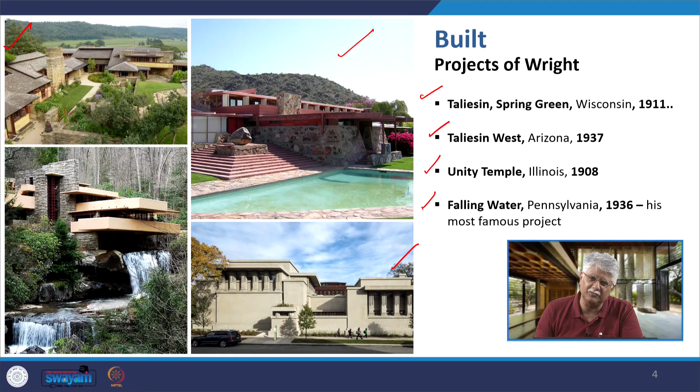He also built taller buildings, though he was not in favor of them, but there were some initiatives he took, like the Price Tower in Oklahoma in 1956, the Johnson Wax headquarters building in Wisconsin in 1939, along with the entire Johnson Wax complex, and the Marin County Civic Center in California, a big project in 1962.

And then the summation of all his works, during which he passed away, was the Guggenheim Museum in New York. It stands as a testimony to the greatness of the architecture of Frank Lloyd Wright, often compared, by your generation more so, with the Guggenheim Museum in Bilbao by Frank Gehry.

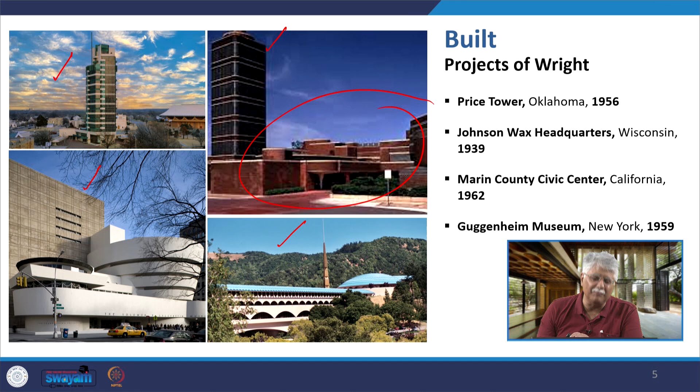Now, what is the impact of the Prairie Houses? The Prairie Houses led us to a new domestic architecture, a domestic architecture of horizontal lines, I'll explain to you why, of low pitched roofs and open interior spaces, predominantly meaning a free flowing plan. The impact of the Larkin building was that the innovations he brought in had a very strong effect on modern office building design.

This is the Larkin building. The building is no more. It was built in a very dense industrial district in Buffalo, New York. The building was ultimately demolished, but the agenda was to innovate modern office building design, and he innovated it at so many levels.

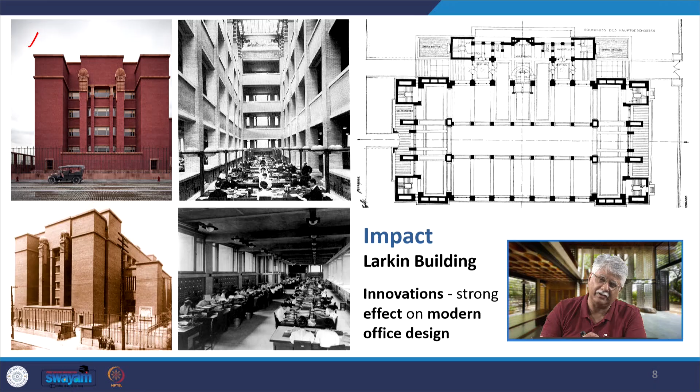Then innovating in structural systems. I told you that he was part civil engineer, an excellent civil engineer, or rather I should say structural engineer. And so in Fallingwater he went in for cantilevered construction, which still stands today. In the Imperial Hotel in Tokyo, he brought in a very unorthodox earthquake resistant system. As a result, the building stood firm even in a very big and massive earthquake that happened in 1923.

Then the unorthodox Johnson Wax building with its mushroom shaped column, as you see here, which initially the authorities were not willing to sign off on or allow him to build. So he actually got one built on site and overloaded it in front of them way beyond the factor of safety, way beyond the load the column would ever have to carry, and only then did the column crack. And all the people immediately realized Wright had built something that was going to last.

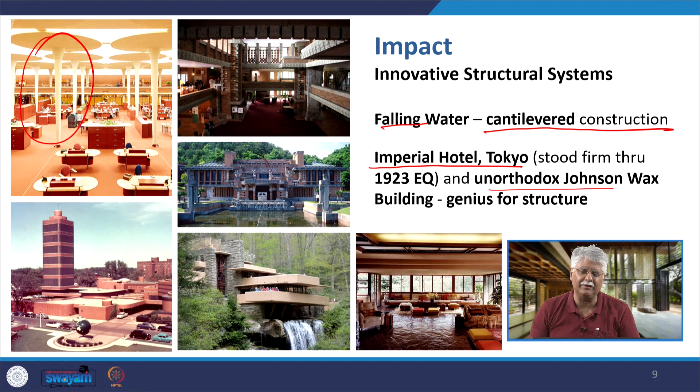It was structurally fine, there was no problem with it, and they had to acknowledge it, they had to agree to allow him to build it in the Johnson Wax. Now, Fallingwater itself has been said to be a poetry of interlocked spaces and masses, one of the greatest examples of organic architecture in America.

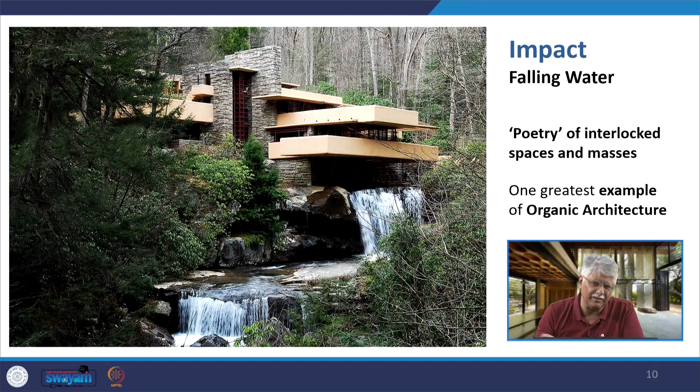What is organic architecture? I keep on saying organic architecture. Organic architecture is an architecture that has got to do with the land and with the resources, that it becomes one with them. He said, for example, a house should be of the mountain and not on the mountain. I hope you get it. The house should be not on the mountain but of the mountain.

When you make a house along with the mountain landscape, make it in a manner that it becomes one with the mountainous landscape. You draw your building material resources from there, you try to design it in a manner that it completely merges or flows with the terrain of the surrounding landscape, as much as an architect can possibly do. So organic architecture is an attempt by Frank Lloyd Wright and others who followed in his wake to build a building that is in harmony with the natural environment and not against it, right?

A lot of these things we hear about today, because we want to make buildings that are zero carbon, sustainable buildings, energy efficient buildings, and carbon efficient construction. What are we really talking about? This is what we are talking about. We want to make buildings that do not destroy our natural resources, that preserve our water, our land cover, that do not allow too much carbon emissions that cause damage to the atmosphere. What they were talking about empirically and intuitively, we are now talking about scientifically and numerically, but the result is the same.

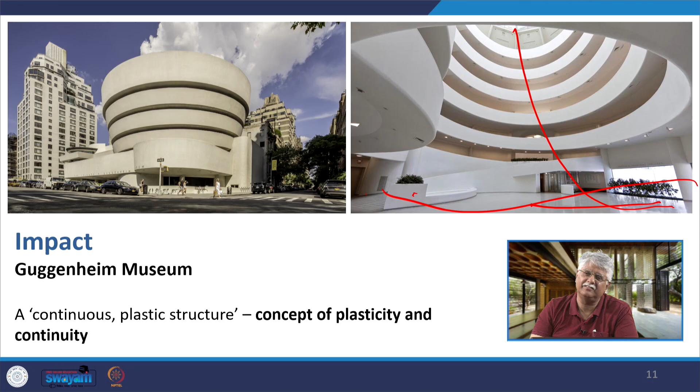It's a building that flows in terms of light and wind in the vertical direction and flows in the horizontal direction. Here he was able to achieve movements of people in the vertical and horizontal directions, and wherever you are standing in the museum looking out, you will see the entire exhibition displayed, all the people watching it at different levels; you are always connected with them, the concept of plasticity and continuity.

Now when we go back to the early influences on Wright, he was influenced by Japanese art and architecture, Mayan architecture, and later on by modernism. Very small beginnings, and even great architects start with common projects. He designed the Charnley House in Chicago in 1891, and his great desire was to break the box. He always wanted to break the boxiness of the house, where you have a box with a series of smaller boxes in it, each opening up through a linear corridor. He did not want that. He wanted the house to be a free-flowing interior space.

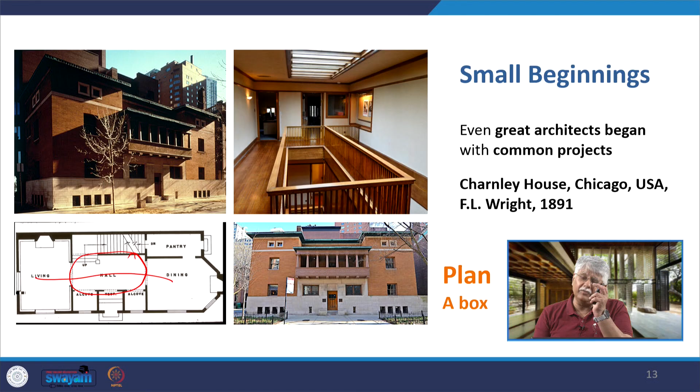But when he attempted that in the Charnley House at a very young age, he was not successful. In the Charnley House there is an attempt made. He has created a hall big enough, connected it with these two large spaces, but the box pretty much remains the box. Then the Japanese influence came. He did the Charnley House in 1891, and he was searching for something that would lead him towards breaking the box, and that something happened. In 1893, there was the World Columbian Exposition in Chicago, and in that exhibition was displayed a wooden Japanese temple.

This completely transformed Wright, completely fascinated him when he saw it, and through this he was able to transform the whole idea of residential design of houses in America by focusing on Japanese principles versus the prevailing Western formula of boxes versus what the Japanese were doing.

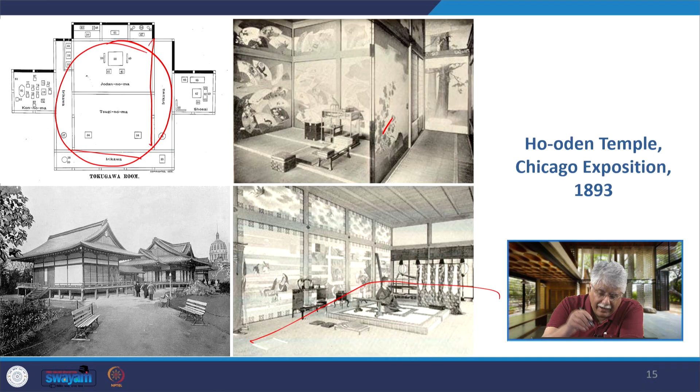The other thing is that the entire design in this case is based on the size of the Japanese mat called the tatami, and that governs the size of the house itself. So Wright was able to understand the concept of Japanese architecture, and its first appearance happened in the Winslow House just 2 years later from the Charnley House. So you see it like this: Charnley House 1891, he sees the exhibition in 1893, and in 1893 he gets the commission to design the Winslow House in Oak Park, Illinois.

For a very rich man, he designs the house, but he is not able to break the box again. He fails. He attempts. So if you watch carefully, there is this space here that is opening up towards the bay window. There is a connection with this space and this space. They seem to have certain fluidity, but when you start going into the interior of the houses, you realize things just start falling apart. So much so that there is a complete contrast between the front and the rear facade of the building. You see as if you are looking at two different buildings.

This is the front, which is very, very strongly symmetrical along the central axis, and then you see the rear, and all hell breaks loose. Every conceivable geometrical feature: there is a cylindrical feature, there is an octagonal prismal feature, there is a pitched roof. All of them are coming together in the rear. Thus there is a strong symmetry in the front, very strong, and a collection of forms in the rear.

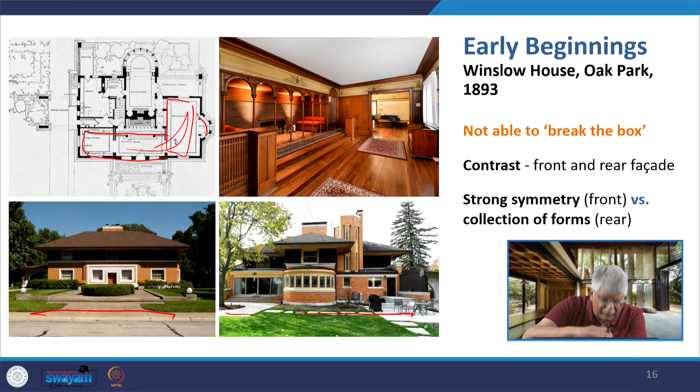No doubt that these houses in themselves were good houses. They were still uniquely different from the other houses. Some of the ideas were different, like the height of the building, the way that he perceived it in a flat prairie landscape, that idea was here. But if we go on forward, other than this, in the early Winslow houses, we also find the decorative work of Louis Sullivan. As I have told you earlier, Sullivan was connected with the Art Nouveau movement, arts and crafts, and he brought that kind of decoration in his tall buildings.

And because Wright worked with Sullivan, he was impacted by Sullivan, he brought in that artwork into his buildings, and there was a connection of the arts and crafts movement in the woodwork of Wright's buildings. See, Wright was the total designer. He wouldn't just design the house; he would design the furniture, design where to place the painting. All details were worked out by him as the architect. So these ideas of the arts and crafts movement, etc., were also carried over into the early houses. So we find the evidence here.

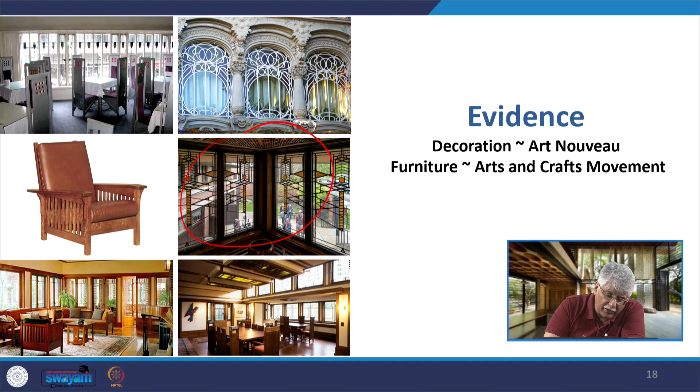With regard to decoration, we see Art Nouveau style grille work in the work of F.L. Wright, and in the furniture we find the arts and crafts movement style, that of people under the arts and crafts movement like William Morris, etc., and their furniture was highlighted here.

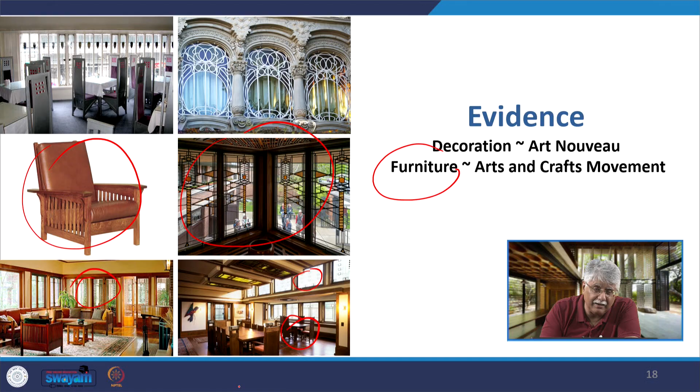So, breaking the box from complex boxy interiors into spacious and fluid spaces, he began to solve that problem by first making it a cross plan, a cruciform plan, and that he attempted in the Willits House. He designed this so-called cruciform plan. As a result of this, now if you watch carefully, this is the central area which has got the fireplace also, and now the space flows on the side and goes into the back region.

In this case, it flows and goes into the dining area here, flows and goes to the kitchen area here. It does that without the need of barriers like doors, etc. So now there is a certain fluidity in the entire space. He is able to achieve that, he is able to allow that kind of flow happening in the building, and this is an idea he has borrowed from the Ho-oden Temple, but he could not achieve that so much

in the Winslow House. So, the cruciform plan is in the Winslow House, and this is a moving up from the cruciform plan we find in the Willits House. So, we find here the cruciform Willits House. We have moved forward from the Winslow House to the Willits House in creating the cruciform plan.

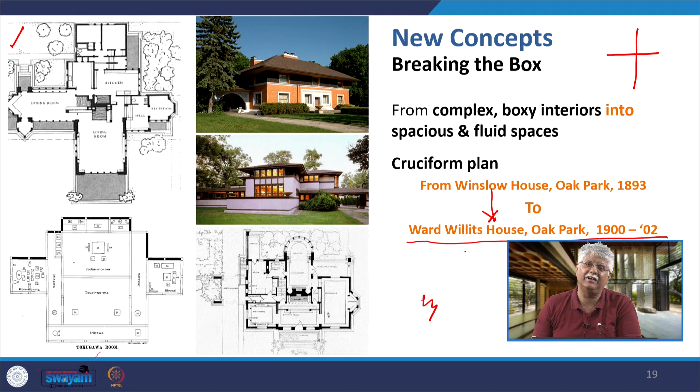Again, this is an example of a traditional Japanese house. This is a traditional Japanese house, and we have compared that with the Prairie House. I have compared it with the Robie House, which I will show you, to show the free flowing interiors that had come into the work of Wright. So, this is the free flowing interior. These are the two examples of Japanese house, and then we have this and this as example of the free flowing house, which is the Robie House. So, we see these new concepts coming in.

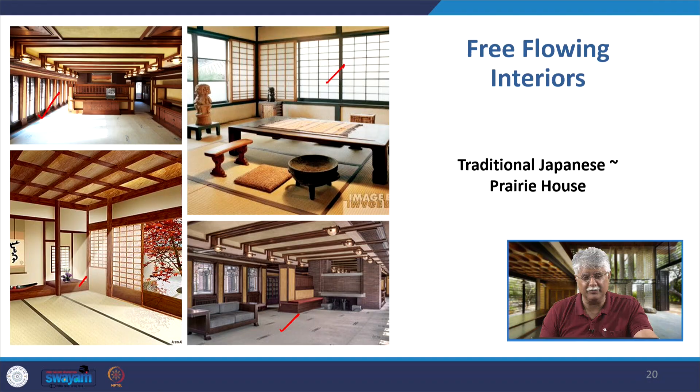When it came to the free flowing plan, he attempted it in the Winslow House, he pioneered it, but only this much he could bring about that fluidity. When he did that in the Willits, much of the house was made fluid and the open plan movement in which people could just flow from one place to another.

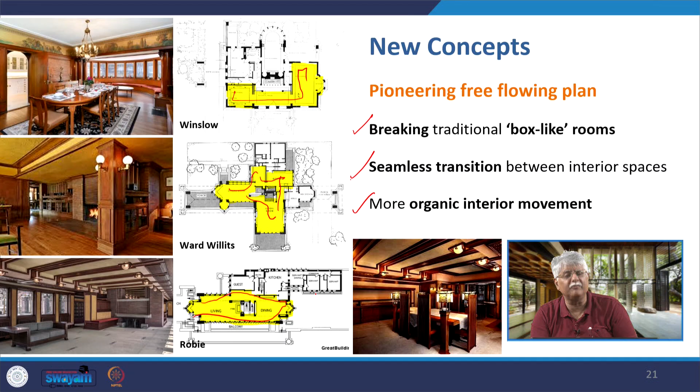Whereas when we come to the Robie House, the entire floor plate here with the living and the dining is completely flowing one into the other, except for the fireplace in the center, and he retained the fireplace in the center. He considered that fireplace or that hearth to be the center of every family. It provided psychologically a sense of security regarding the family that is holding them together. So, he never removed that, but he brought this idea, and thus he was able to break the box. He brought in seamless transitioning, and he brought a more organic interior movement, more fluid and open planned interior movement.

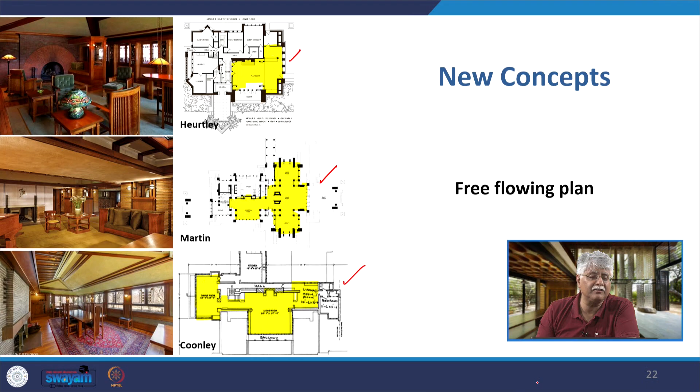Now, the horizontal proportions were emphasized. Horizontal proportions, that the building is more horizontal than vertical, was emphasized through overhanging roofs, because they tended to pull your eye towards the horizon, towards the flat prairie landscape. Other than that, they also provided shade for indoor thermal comfort. The lowering of the scale was able to harmonize the building with the long and flat prairie landscape, which was his original intention.

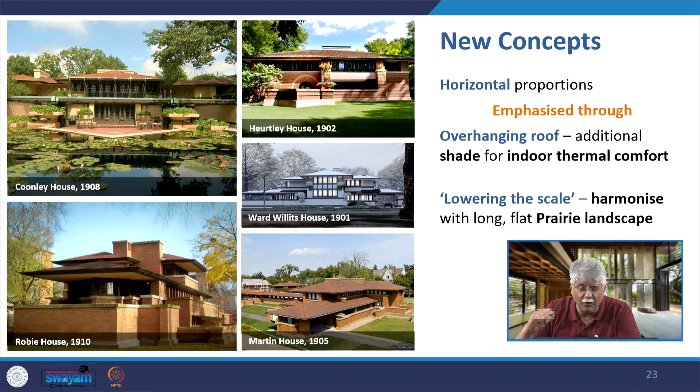As he said, the house should be of the hill. Therefore, if the landscape was completely flat as in the prairies, the house had to be of the prairie, completely low height with large overhangs. When you looked at the house, your eye should be drawn towards the horizon, towards that line, and thus feel small. The scale seems to be pulled down and not tall but flat and low horizontal like the landscape. So lowering the scale, harmonizing with the long flat prairie landscape.

So if you take the Winslow House here and an ordinary house of that period, you see this is what happened. In the Winslow House, these are two stories. What he did was, this coping that he has provided, this band, he made it slightly higher into the floor above. I mean to say that the floor plate between the two floors would be somewhere here, right? He made it so that the window would start from this darker area. You would feel as if it is a 1.5 story house, but actually it's a complete 2-storied house.

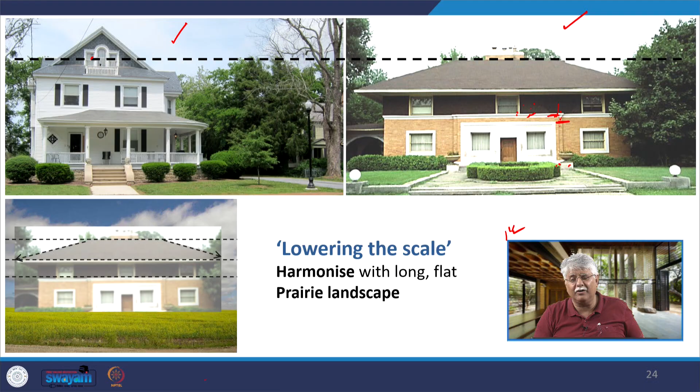But by the way they have arranged the outer aesthetic, the way the roof has been extended on either side, the way the roof has been overhung, it's a pyramidal roof, the sense given is this is low. So you compare it with this house, this is a complete 2-storied house with maybe an attic, but it seems higher, taller, and this is what I was showing, the various lines which are all pointing towards the horizontal direction.

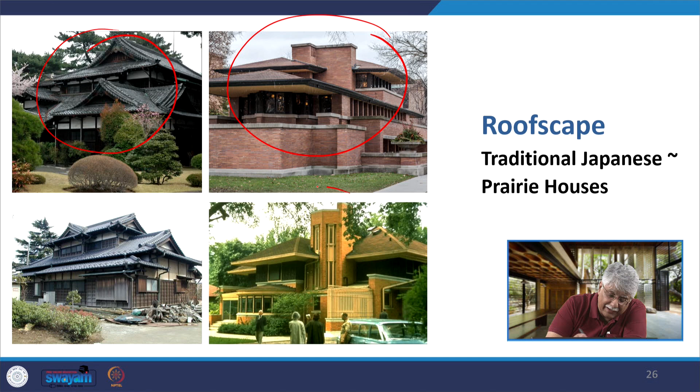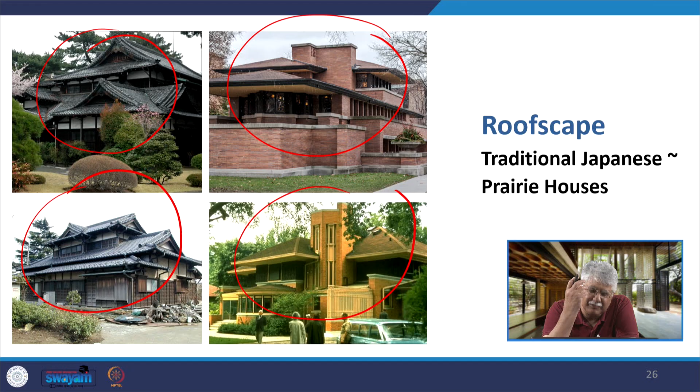When it comes to the roofscape, again we compare it with the traditional Japanese. We see that this is the traditional Japanese composition of pitched roofscapes, and we find the same combination in the Robie House, a collection of pitched roofs, like the collection here in this temple. Wright was so deeply influenced by the iconography, by the pictorial representation of Japanese architecture, he borrowed heavily from them.

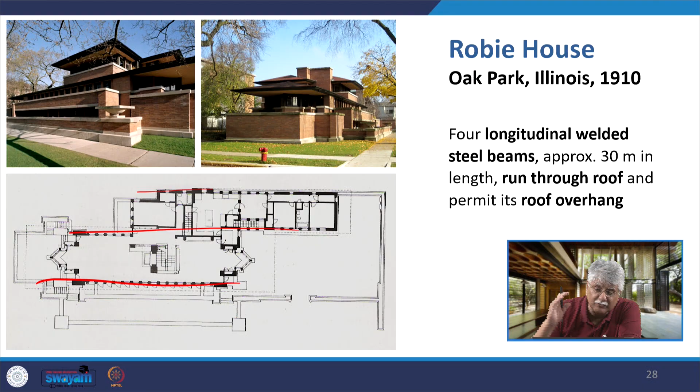To get that kind of cantilever he wanted in the balconies and terraces of the Robie House, he provided 4 longitudinal welded beams running in this direction, so that these welded beams will carry the load of the roof, and they are approximately 30 meters in length. They run through the roof, and therefore he could have large overhangs as you see here, and these large overhangs not only serve to provide shade to the people standing outside, but they also pointed you towards the horizon, towards the horizontal line, and thus lowered the scale.

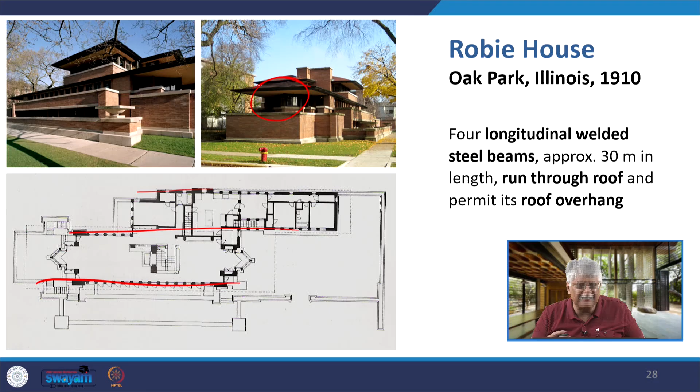So when you look at the Robie House, ask yourself this question even as you are hearing this lecture. Does it look to you like a complete 2 to 2.5 storied house? It looks smaller, it looks more compact, but it's got the same amount of space, the same volume and open spaces inside it. So in lowering the scale, he extended the cantilever terraces like this, with low story heights. Here, see, he constantly extended it.

And then he gave horizontal parapet bands. There are these bands given in concrete here, and he gave long elongated enclosures around the house. All of it to show the scale is low.

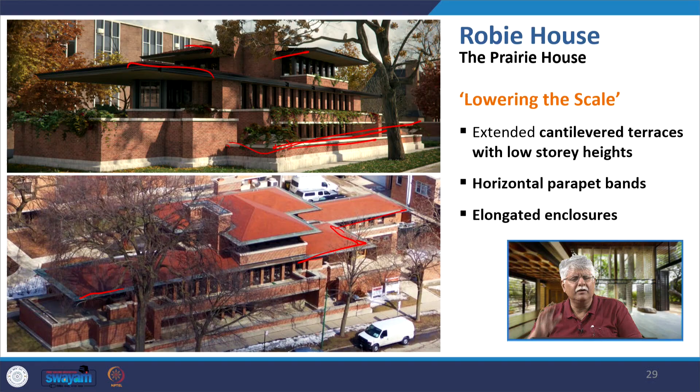At the time, the rich people would like to have a monumental building that would show how wealthy they are and how great they have become. Wright, when he worked for these same millionaires, gave them a house that was unpretentious, that was just off the street and very quiet, very understated, very low key, and yet it was the beginning of a completely new movement in architecture. Lowering the scale throughout is what he attempted to do.

In the Robie House, the technical innovations are that the rim was set lower than the ceiling, as an enclosure, and it emphasizes horizontality. I am talking about this rim. This rim has been made lower than the ceiling of the house, and it is used for several purposes. There are lines running above it in the vacant space between the false ceiling and the main ceiling, and along this he hung these Japanese globe lights with wires set into it, and the wires would be completely concealed because they are going into the backside.

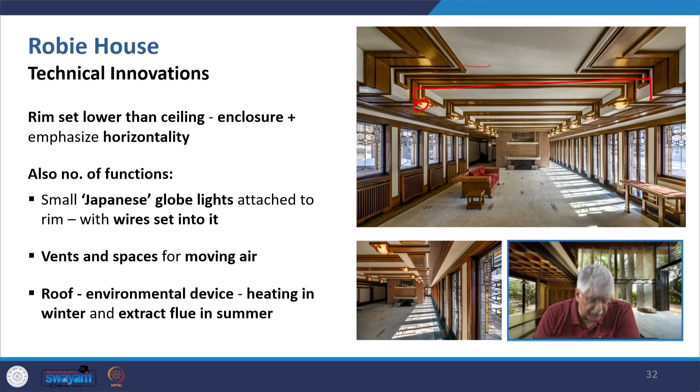And vents and spaces are there in this system for moving air in the building, because in those days we are not talking about a complete air conditioning system. Thus, in a sense, because of the way he designed this roof, it became an environmental device which would heat the building in winter and extract flue through the house in summer and keep it cool. So this kind of technical setup was made here through this roof feature, not only to bring in light and hang these Japanese globe lights wired on the inside, but also to move air through the vents and spaces, to heat it in winter and extract flue in summer to cool the house down.

Now, the guiding principles of domestic design: he said, reduce the number of separate rooms to a minimum, and altogether they should work as an enclosed space. This is based on a vast experience of having designed houses based on this new ideology or philosophy of free flowing plan. He came up with these principles based on that.

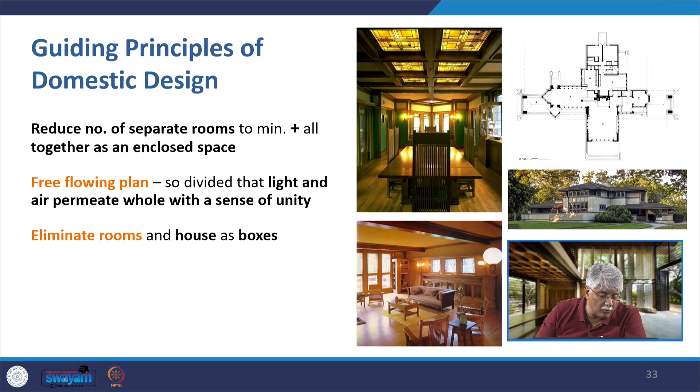The second is free flowing plan, so divided that light and air permeate everything in the house with a sense of unity. Number 3, eliminate rooms and houses as boxes. Don't box everything down. Don't have boxes, this one room a box, second room a box. Don't have it like that.

All walls should not be solid load bearing walls. Now the walls are only moving screens or enclosing screens or partitions. So here was the concept he was bringing in of RCC or frame construction, that the walls would not be carrying load any longer. Then walls and ceilings and floors, one large enclosure with inner subdivisions should be there. So we make one large enclosure, that is the house with wall, ceilings and floor, and then subdivide it with these partitions. That is in a sense what he was saying.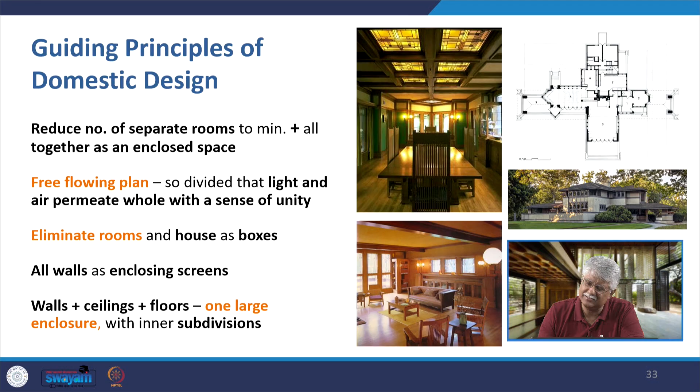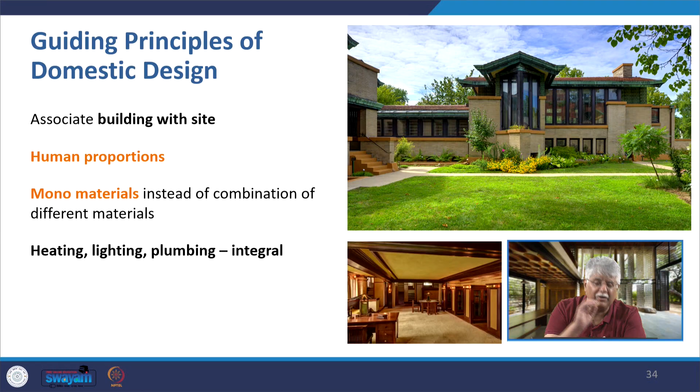And then associate the building with the site, have human proportions, use mono materials instead of a combination of materials, combination of different materials. Focus on simple palette of materials when you design. Then take care of heating, lighting and plumbing as they are integral to the building, and thankfully in the modern times we are very cautious about it. Our heating, lighting, plumbing, MEP, HVAC, all of it are very well integrated.

Then furnishings should be one with the building. It should be designed using machine work, not using hand craftsmanship. He was talking about prints, he was talking about furniture that was straight line, simple, clear cut, not very intricately designed like a textile designed by a craftsman. No, he was talking about very simple straight line furniture, simple tapestry, straight line, simple upholstery, all of that was simple. This is akin to Scandinavian furniture, which is also straight line, simple geometry. And we later on see that he had a tremendous impact on those architects in Europe.

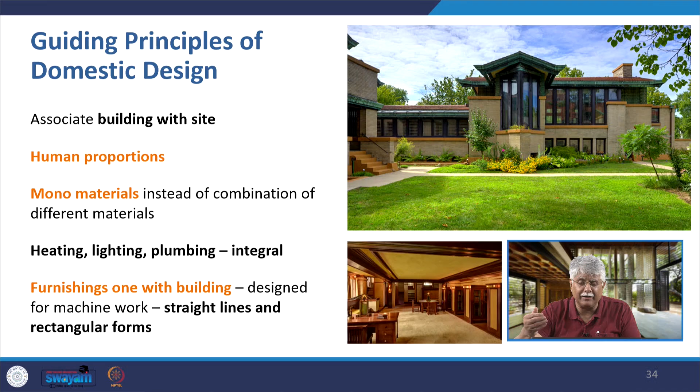This is the example of the Martin house, a very extensive house based on the organic house principles that he designed. This is a house in Utrecht in Europe, which I am putting up to show how younger architects were getting deeply influenced by Wright. Here G.T. Rietveld designed a house which was completely openable. These are partitions. If you remove the partitions, this is how the plan becomes of the house.

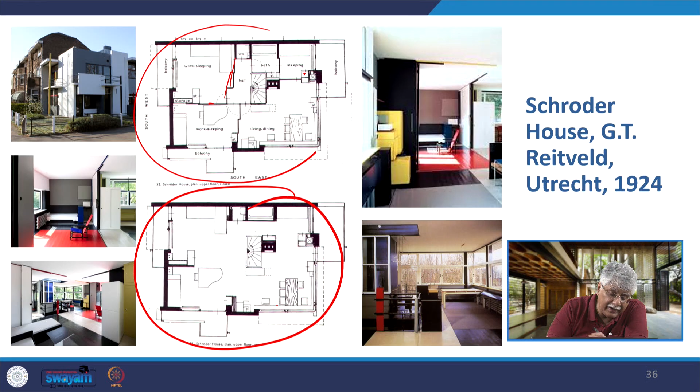It's a completely free flowing plan in which you have the dining area, the living area for example, a nook, a corner, and then you have a staircase here connecting everything. All the spaces in the house, everything is free flowing. This was Schröder House. And then if you want privacy, then you can just push some partitions and it becomes a space for 3 or 4 rooms. Very simple. So they went ahead of what Wright had done. They continued or they borrowed or they were very impressed by the idea of free flowing plan, but they built it further with modern technology and modern understanding.

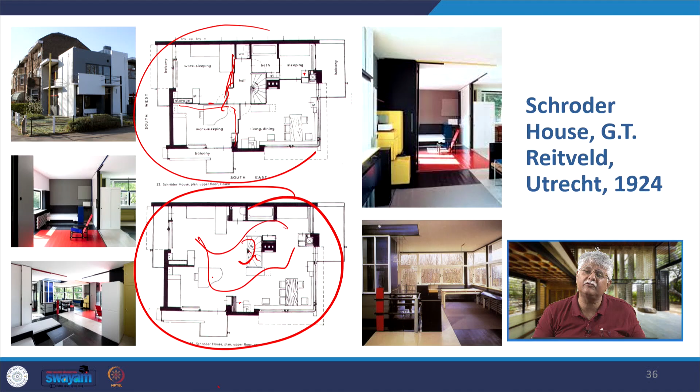Not only that, you will see in these houses, they are also using less colors. They are also trying to go towards simpler palette, but they do use very vibrant primary colors which Wright would normally avoid. And thirdly, if you find on their glass there is no grill work, something which was there in the works of Wright. Till very late he had this art nouveau and arts and crafts kind of decorative grill work in his houses, and that is not there here in the European houses built with the strong inspiration of Wright. So contemporary free flowing interiors, there are many such examples.

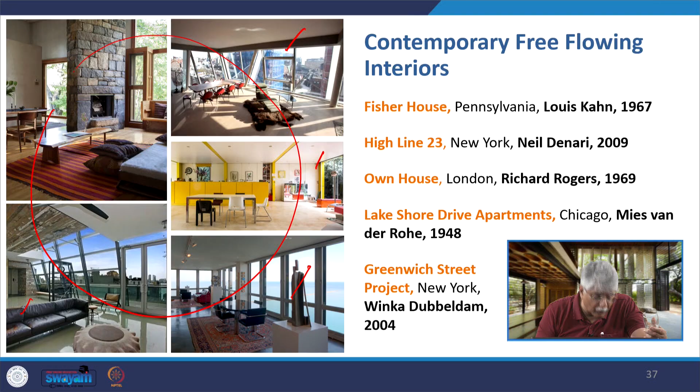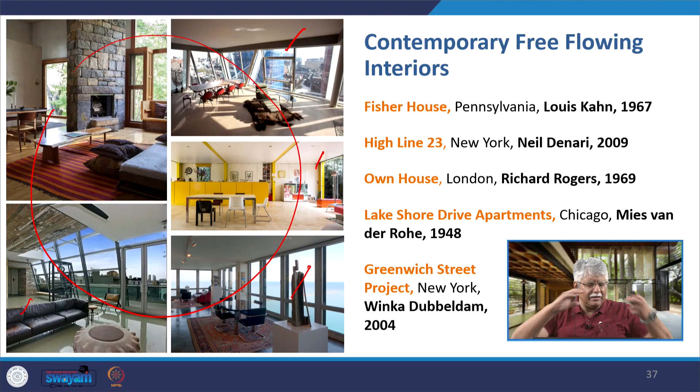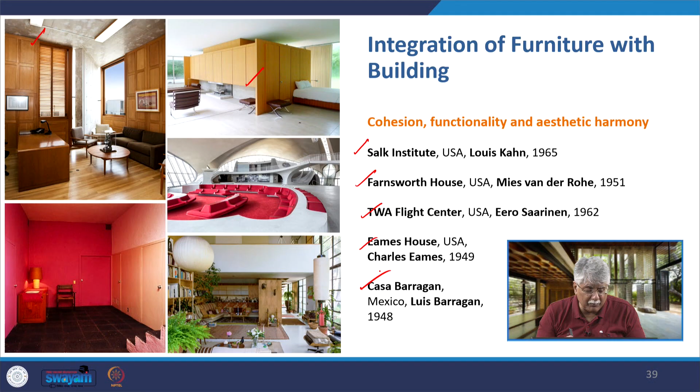And then in the Farnsworth House again you find glass and steel, and then it is connected or integrated with wood, whichever inner room spaces had to be designed. Then the TWA Flight Center, which is again using exposed concrete inside and out. Then we have the Eames House by Charles Eames, and again what you find is that all the decorative work is all in harmony with the house that they have created. And finally we have the Casa Barragan in Mexico by Luis Barragan.

But this impact on the European architects had a reason. You see, Wright had some very strong personal troubles in America at that time, and because of that he had to leave America. Having left America, he landed in Europe, particularly Germany, and there he was in connection with some people wishing to publish his work. Younger architects in Europe had seen his work, were very influenced by his work, wanted to embody that architecture in Europe, but they had limited access to the drawings of Wright.

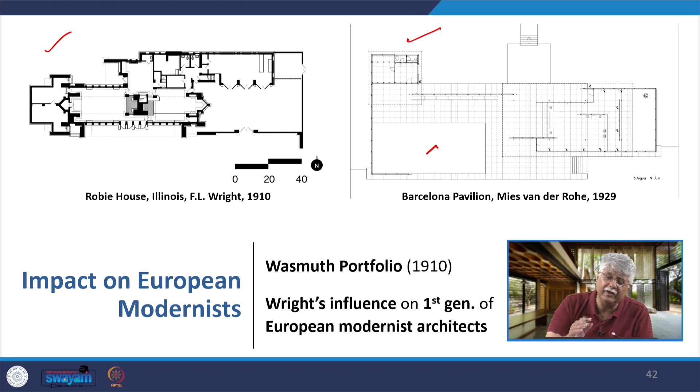So though they were borrowing from Wright, they were not doing it blindly. They were doing it appropriate to what they thought was right. So when you see the fenestrations of both the Robie House and the Barcelona pavilion, you see the difference. These are the grill work, and in Barcelona it is completely gone, it is a plain glass window.

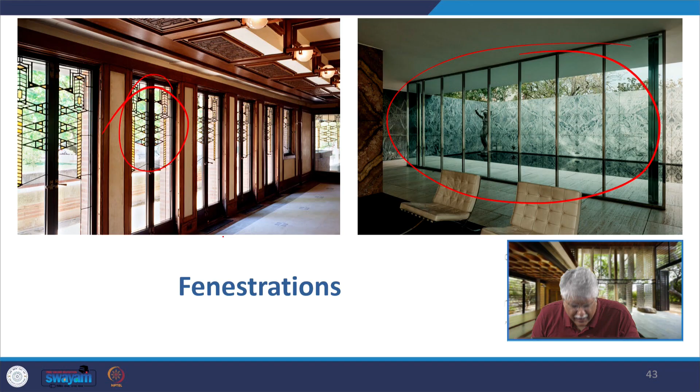So we will end here, having looked at the beginning of the works of Frank Lloyd Wright, his whole concept of an open space, open plan, free flowing interiors, and how that got impacted. Other architects started implementing them in their works, and we ended by looking at the close relationship of the De Stijl architects with the works of F.L. Wright, but it was not a direct one-to-one copy. They did it very intelligently; according to their need, they were able to adapt it.